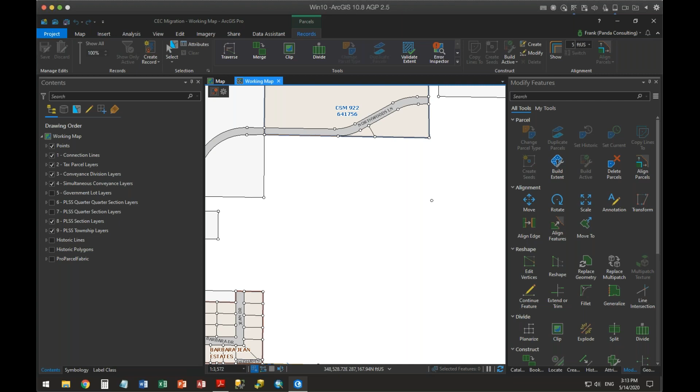So let's start with this. What is the parcel fabric? And those of us that are sort of computer people, we can look at this thing and say, oh, this little blue thing here, that's the parcel fabric.

Well, what is that? It was clear in ArcMap that the parcel fabric was a structure that constrained how things fit together. All right? It's gone. Instead, inside of Pro, the parcel fabric, and Esri shudders when I say this, but the way I describe it is that the parcel fabric is a super topology.

It is not a data structure as much as it's a tool that we can use to check what we've built to make sure that it complies with the rules that we've established for the parcel fabric. So that when we utilize the parcel fabric, what we do is we say...

this thing that I have right now, this is a parcel. Make sure that I have a polygon, make sure that I have lines that are associated with that polygon, make sure I have points at every break that I have in there, and make sure that they topologically fit within themselves. Not that they fit the surrounding things, but that they topologically fit within themselves.

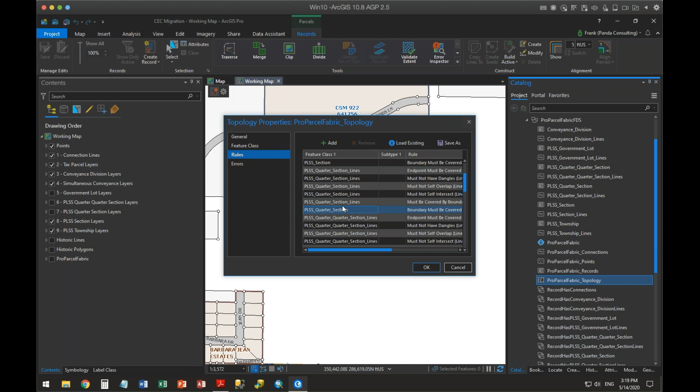That's all. So Frank, we have a couple of questions. Nancy asked, so it isn't a polygon of the area covered by the record? And then she asked, can one line have more than one record?

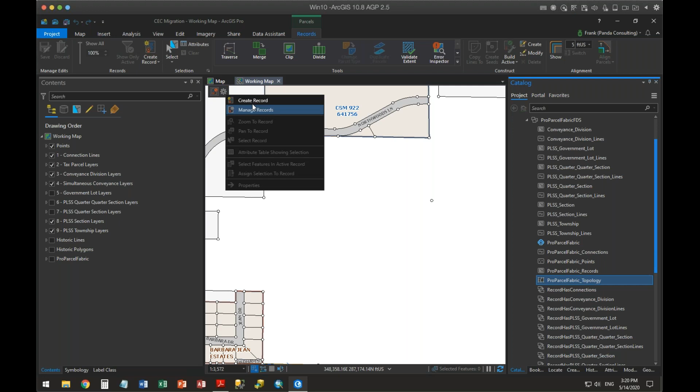Yes. Let me answer those questions. So a record is unique in that - I'm going to go in and create this just to illustrate. I'm going to go create a record over here. There isn't a whole lot of stuff in here, but that active record turns on the parcel fabric tools.

I'm on the parcels tab, and here are the specific tools. Now, watch - when I minimize this record hub, which is what this is called, those tools disable themselves. It won't let you do anything because the parcel fabric is turned off. When I re-enable it, those tools become active again. So it's nothing more than a series of tools to help you finish building your parcels.

So let's start with this. Let me go over here and just create a polygon. Now, when I create that polygon, it's just a polygon - it doesn't have points on it, doesn't have lines on it, doesn't have anything on it. Well, because the parcel fabric has these rules, when I say let's make sure that's a parcel, it built my lines, it built my points at the ends of them. Now it has all of that on there.

So what that's done is when I clicked build, it tested that polygon I had created, which had been tagged with the global ID from here. It says, okay, let's check this polygon that's sitting out there - does it have lines? Does it have points? If not, let's build them. That's all it does. But it also went and created, over in the record, a polygon that has the same geometry as that.

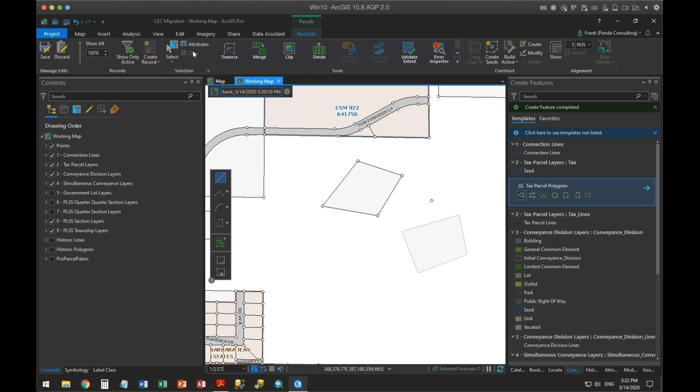Now, if I keep this same record active, I can go over and say, well, let's just create another polygon. I can unselect this - it doesn't have to be selected, because the software knows that the new polygon I created has already been tagged. I'll show you here - if I go to the attributes area, this polygon has already been tagged, it says it's been created by the global ID of the record. That's what that is.

So it says, okay, now I know what it is. And I can say, well, make sure this is a real parcel, so I can say build it. Sure enough, it went and built the lines, built the points for me. And now that record has a polygon, which is both of those. Let's go in here - in blue, this is the polygon for that record.

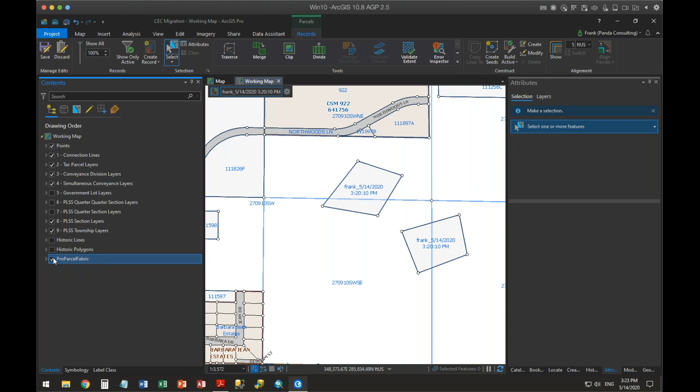So to answer some of Nancy's questions - I forget some of them. So, is it a polygon of the area covered by the record? No, actually it's the reverse. The record is sort of reactive - it shows you what's been built by that record. As a matter of fact, if I go into my hub and say, show me everything that's part of that record, it will go and select all the lines, all the tax parcels that are part of that record.

Okay, so it's sort of the reverse relationship. The record doesn't come first - the record is reflective back, showing what was built as a result of this. So the other question you had was whether a single line can be part of multiple records. The answer to that is no - it cannot be part of multiple records, because a line only gets marked by the record that created it, not any others that use it, only the one that created it. So it's not a one-to-one relationship, or even a many-to-one relationship. It's neither of those. A record keeps track of and marks itself - it's a good way to say it. It's like a dog.

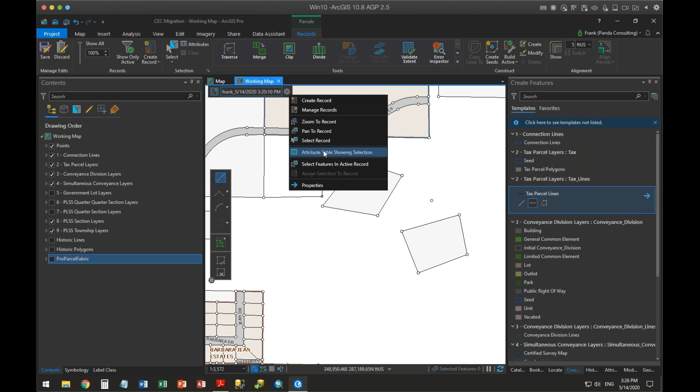If I say, okay, now create a parcel out of that, the test for determining whether or not it's going to create a parcel is this seed. Tell it to create a seed. In this case, I don't have a closed polygon, because select the records in here, I don't have a line across here.

It doesn't evaluate anything other than what is marked with that record. So if I go in here and say, let's put a line from here to here, again, and I can unselect it just to show you it has nothing to do with that. I can say, okay, now create a seed. Now there's a little seed here, you can see it.

It says, okay, now the things that are marked with this record, that will create a polygon. So when I say build it, it's going to evaluate the things that are part of this record, and it's going to say, okay, you've got lines here. These lines form a polygon because you have a seed there. I'm going to take that seed and expand it to those lines. And now I have a parcel there.

So again, the fabric does nothing more than help you to build the parcels. It doesn't evaluate whether it's coincident with the other things underlying it or on top of it. It doesn't necessarily automatically clip things and make sure that things are in the right place. It just makes sure that you have valid parcels. You have a polygon, you have lines, and if those points don't share corners with other things, it creates points. That's all it does. As you get deeper in it, you realize there's attribute rules and validation rules and constraints, but that's it. It's to help you build parcels.

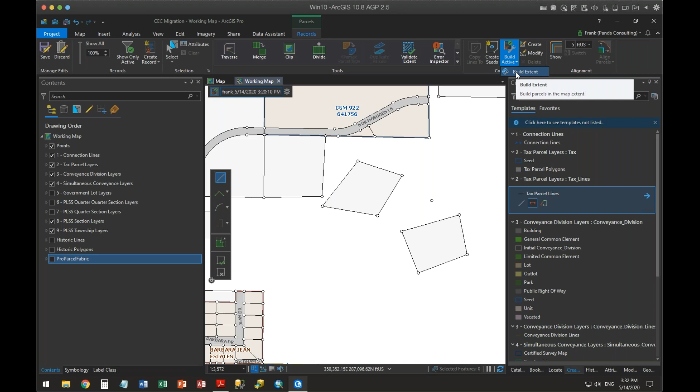And I can tell you, between you and me, go ahead. No, go ahead, finish. I was going to say, I've already found where I'm working on things and pulling data in, and sometimes I forget to do certain steps. I'll run through, and on this build active here, there's also this build extent, and I'll test to see, is everything in here built? It will test not just the current or active record, but all the other records inside the parcel fabric, and clean them all up at the same time. So it's a nice double check to make sure it's all built correctly.

What are the attributes of that record, Frank? I mean, you created the record, but were there additional attributes you could add besides your name? Oh, yes, yes. So let me go over here to the data designer now on the records. By default, there's certain attributes in here: an object ID, a shape, and a name field. And then there's a record type.

And the record type causes a lot of confusion, because from an organizational standpoint, if you want to keep track of a record and differentiate between different records, how do you differentiate? Do you say this type of record is for this layer, attributed by your parcel types? Or do you say this type of record is an action, a split, a combine, a subdivision, or whatever? Do you define it by action, or by the document itself? With the ArcMap Parcel Fabric plan, it was always, let's reference it as a document. But the reality is, with a record, you can do anything in there, and there is no best practice defined by Esri yet on it.

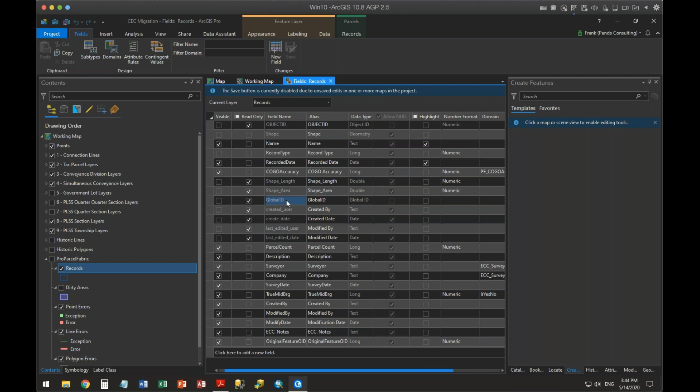All right, and then we have shape, length, and area, and the global ID, and then all the edit bys on here. The records also have a field called parcel count, because as I showed you and demonstrated, you can have a record that has more than one parcel in it. So you can have multi-part records on here because it reflects all the parcels that were created while that record was active.

That's why, in 2.5, it actually has this additional field called parcel count, which tells you, oh, this record actually has 4 parcels associated with it. And really all it's doing is telling you how many parts are inside there.

And this data set that we're looking at right now was originally an ArcMap Parcel Fabric that we have migrated over. So it has the ArcMap plan attributes in there - description, surveyor, company, survey date, true mid-bearing, created by, modified, all those others. So if you migrate an ArcMap fabric over, it keeps those plan attributes and puts them into the record.

And you can add your own. I mean, this is nothing more than a feature class. It's just now included within - and I know Ashley doesn't like it - super topology, that's all. It's just another way to go and validate and test those other things on there. That's all it is.

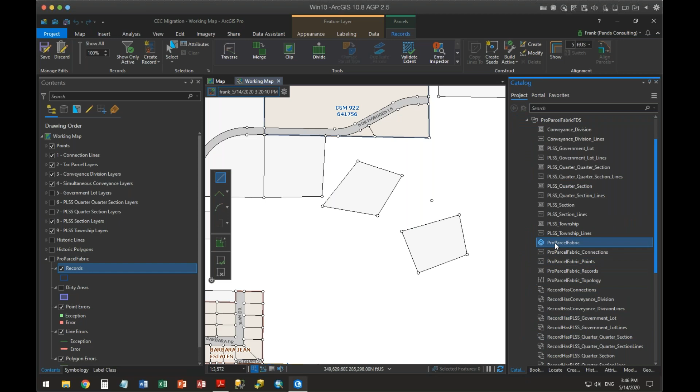All right, so if I go in here and add a new... let's see if I can do it here. Yeah, if I add a new parcel type here, it has the option that says use for administrative boundaries.

So if you think about it - oh, now you understand. So what it does is it lets it go and utilize the definitions, but doesn't necessarily utilize the topology engine for it. So it makes sure that you've got all the lines, makes sure you got all the points, but when you go and edit something around there, it doesn't mark it as dirty.

So you can have zoning layers, market areas, city boundaries, ESUs, county boundaries that become part of the fabric, part of the super topology, without it messing up your topology. Because if they participated in topology, every time you edited something inside it, the entire county would be marked as dirty and you'd have to reevaluate everything. So at 2.5, they have the capability to say, I want this to participate in a fabric, but don't make it part of topology.

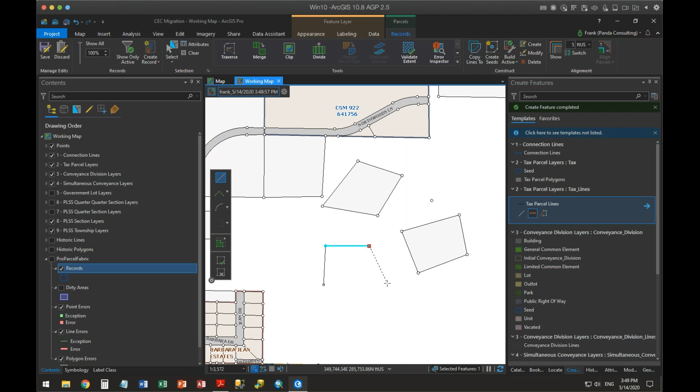Simple enough, I will create lines. Now this new one, if I wanted just to verify how this works, show me the lines that were created that are marked part of this record. That's all it's doing. So there's the lines that were marked as being part of this record. Let's check and see if it closes - that's what create seeds does. Sure enough, it's closed. Now let's go and build this.

Let's go and build it. So let's look at these records. Here's my lines. And in fact, I will bet you that I have turned this off. I am so sorry.

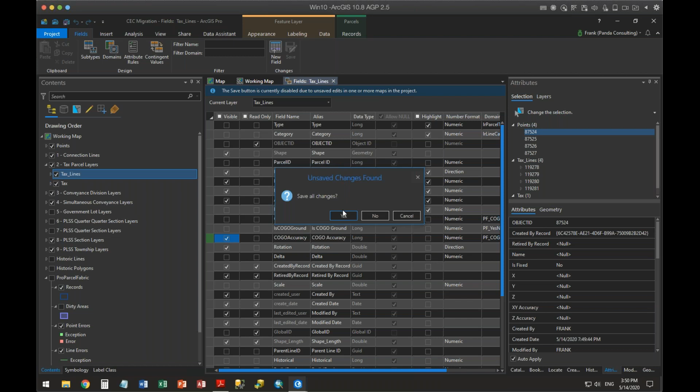Let me go in here and turn on the COGO Accuracy, which still should have been in here. Oh, I have things that are not saved, sorry. Now that I've saved them, let's go ahead and save that out.

Well, the good news is you didn't hang the entire program doing that, which I have done. Correct.

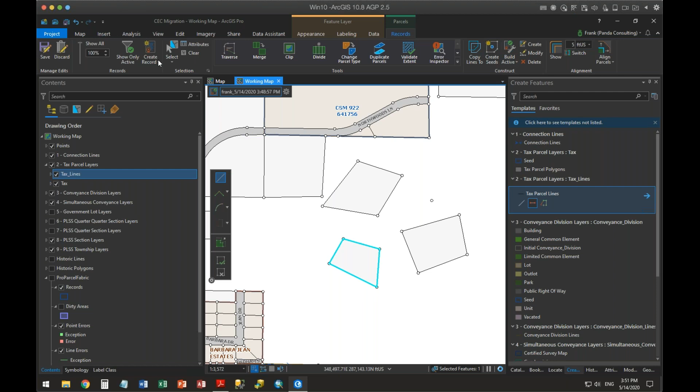Okay, so COGO Accuracy - well, let's just make sure that maybe it should have been turned on for me to do that. So let's test this. Same record. I can go and create the parcel lines again. My record is - let's create the seed, let's create the parcels, let's go and select this. By the way, I kind of know the answer, but I want to work through it just for you.

Nothing. Thank you. Nothing. Well, the reason why I know the answer is because out of the box, most of this stuff doesn't get calculated. Out of the box - this is more of a design strategy than anything else. Out of the box, the configuration, the attribute rules, what gets inherited - none of that is set. You just want to be aware of that. Yes, this is a fabric and it will do some minimal things for you, but don't think it's all set up for you. It's not.

Let's just go to the polygons just to make sure. Now, I think I've turned that off on there too. I have, because I don't use it much. Yeah, it doesn't, by itself, necessarily allow you to go and automatically have that set. You can set it up for yourself, but it doesn't necessarily say that out of the box, it's going to inherit any of those values between them.

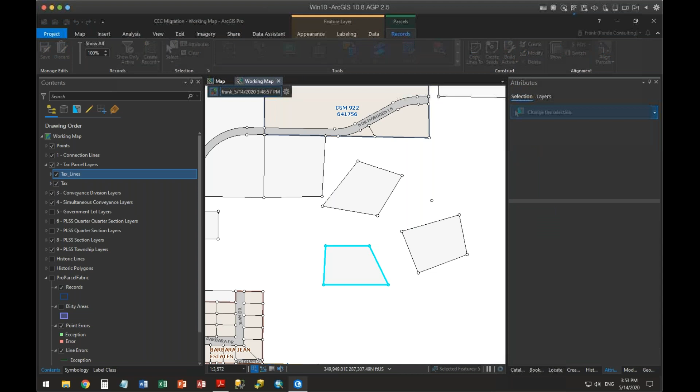Thank you, Brian. All right, so let's go and select everything in here. Let's delete that.

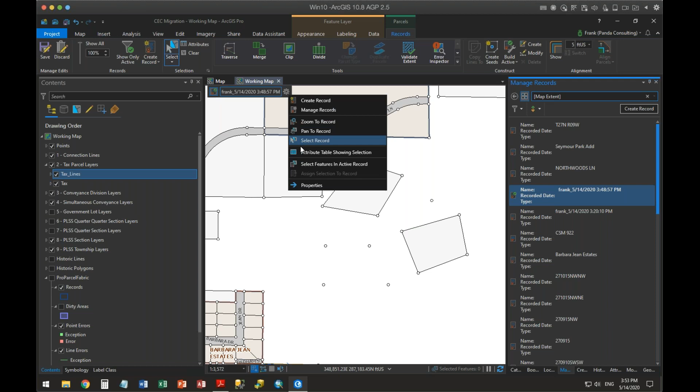Let's go and also look and see in our current extent. Here's the other one that I created. And let's go and get all of those. Maybe it's not this. No, maybe not. There's another one.

So we went down a big rabbit hole there, didn't we? It's good though. I think it was worthwhile.

So do we have any questions right now of anything?

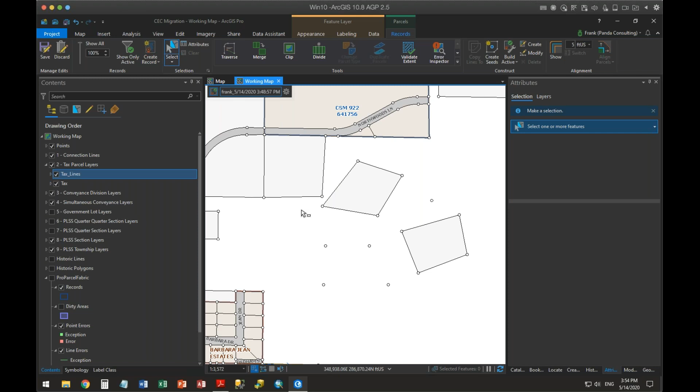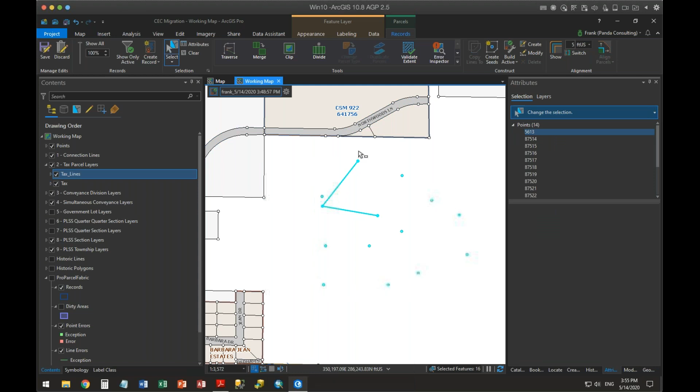Let's go here. A little bit clean up there. All right. So...

I think the next thing I wanted to talk about was some of the nice things Esri has done with the Traverse, and what the Traverse is and what it isn't. I find that as I'm teaching it, Esri now has three different versions of Traverse we can use. We have the ArcMap version, which everybody learned and loved. We have the ArcMap Parcel Fabric version, which was a little more challenging to get into, but once you got into it, you learned to love that also. And then you've got the ArcGIS Pro Traverse version. So let's talk about this and what this is.

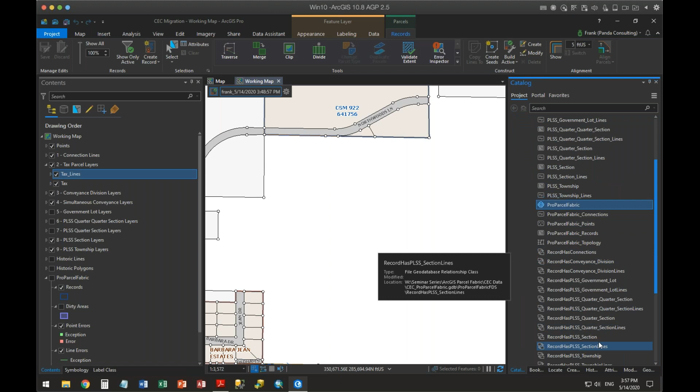So the Traverse allows you to go and create lines that have COGO values on them. And that really is it. It just allows you to create lines that have COGO values on them. The COGO values, and we've talked about this before, if we go and look at a COGO line, a line that's enabled with COGO values, tax lines.

I could have done this differently, but here it is. We can see that, for example, the direction field, which many of us just refer to as bearing, is no longer a string value. It's now a number value. It is stored as a numeric value. And from what I've seen, it's actually stored as a numeric value that is basically north azimuth, starting at north and going in a clockwise direction. You can tell it how you want that number shown back to you, whether you want quadrant bearings, south azimuth, polar, whatever. But I think it's actually stored as polar, and it's decimal degrees in there.

So sorry to interrupt, we have a question though. Why is the Traverse Tool located in the modify features section rather than the create features section?

Nancy, it's a good question. You've heard this before—the how-do-I questions, where-is questions, those are easy to answer. The why questions have to do with somehow having insight into the design, and I don't. Why is it like that? No, I can't answer that. I can tell you where it is, how to use it. Why? I don't have any clue on that. It's a thought process we're not privy to. That's exactly right. Thank you.

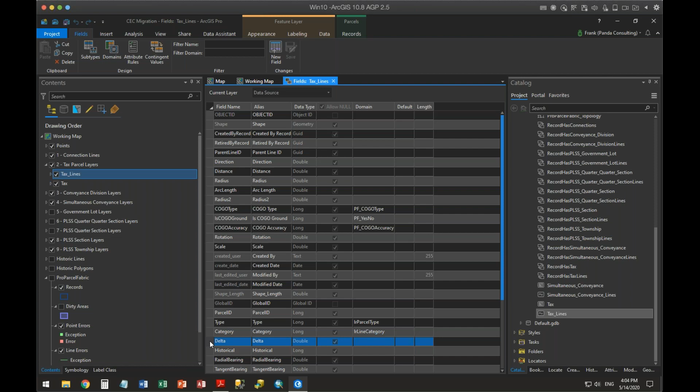That's a great why question, because from a surveying standpoint, the central angle of a curve is more important than the chord distance or the arc radius, since that's the real definition of what's being subtended there. Now, as Reed says, you can calculate that, but the chord distance is the approximation between the ends of the curve—it's the distance between the ends of the curve. The arc distance shows you how much of a bend is in that curve, but the central angle, because we don't have radius points anymore in the ArcGIS Parcel Fabric, isn't needed anymore. Some might point out, well, you've got one here—that's a carryover from the ArcMap Parcel Fabric. But inside the ArcGIS Parcel Fabric, you don't have that COGO value anymore.

With that said, if you have COGO lines, you can now go and do COGO on them. Once you enable the COGO lines, you can go and do COGO on them.

So the first thing when you go to enact COGO is, well, what feature class are you going to be creating lines for? And I can tell you, watching the way this thing gets run, it always shows you the line that's up at the top of your table of contents. It kind of drills from the top down, and because you can have multiple types of lines, you can have a connection line, you can have what's called a link.

You just want to be careful when you're starting a traverse. Virtually every single person I've taught has created a traverse and said, Frank, there's something wrong—it wouldn't create seeds. Why did it not create seeds? Because, and I can almost always answer this, it's because you created connection lines, and you use connection lines to build a parcel, and there's no parcels associated with connection lines.

So, starting at a start point, it comes down to giving the bearing and distance, or the direction and distance, and you can use shortcut notation—a bearing, a dash, and a quadrant. Then a distance field—let's just put 200 feet in here and hit return. Every time you do that, it will move, and you hit return, it'll move to the next one. The difference between the ArcMap traverse and the ArcGIS traverse is that you hit return, not tab. It's return on each of these.

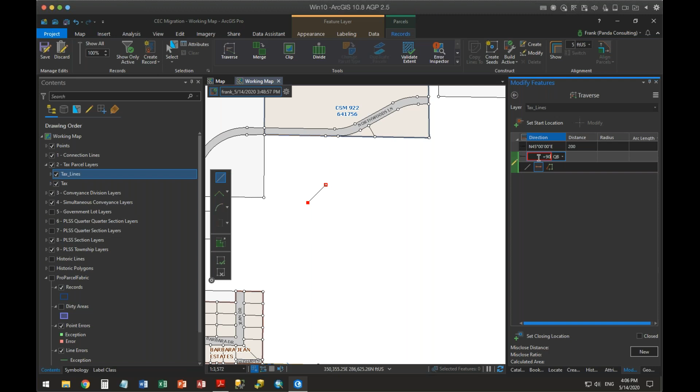So once I've done that, I can go in here and input my next one, whether I'm transcribing a deed or just building something here. I can also do a deflection and say I want to turn 90 degrees to the right from the previous direction. So I can type in my deflection, then type in my distance, and it will do it. The other key difference is that the ArcMap fabric created a sketch, and it wasn't until you hit enter at the end of it that it took that sketch and created lines from it.

This traverse, every single time you hit enter, it creates a new line. It constantly creates lines. So these two lines already exist in my data set, even though I'm still in the middle of a traverse.

And that's a big difference you want to understand. It's not creating a sketch. You can take your courses that you've done and export them, store them as a series of lines, but it doesn't function exactly the same as the ArcMap traverse does. Every time you hit enter here, it creates a line.

So my initial thing was, this is the way to create lines that have COGO attributes on them. So if I wanted to create a curve at the end of this, I could say this is my tangent bearing at the end of it, type 0 here, and say my radius is maybe 50 feet to the right. It's not going to be an arc length I'm putting in, but the delta angle or central angle, 90 degrees. I can do that, and it will give me the tangent bearing coming out of that curve.

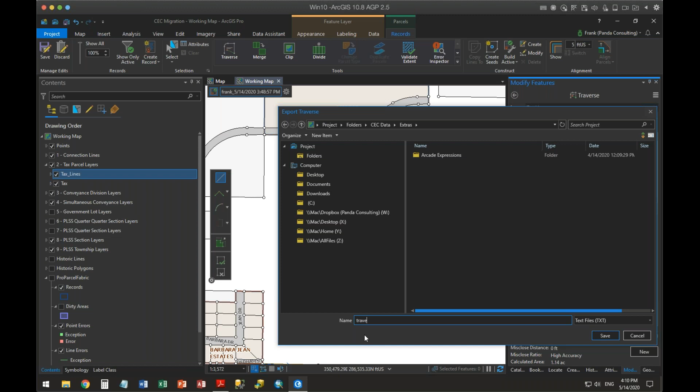So let me show you these things. I have now a set of courses that I've created lines from. I can go in here and export this out, put it into Extras, put it in as a traverse file, and this is a text file. I can save it out there.

When I go to look at it... traverse text file, I can then edit that. Sure enough, this is exactly the same format as the ArcMap traverse file. The direction type is quadrant bearing, the direction units are degrees, minutes, and seconds, the starting coordinate pair, and then direction and distance, tangent curve. Delta is 90, radius is 50, direction and distance.

So it allows me to at least record what's on here, what I've done with this, and allows me to go and input all this. But every single time I do something, it goes and actually creates that feature.

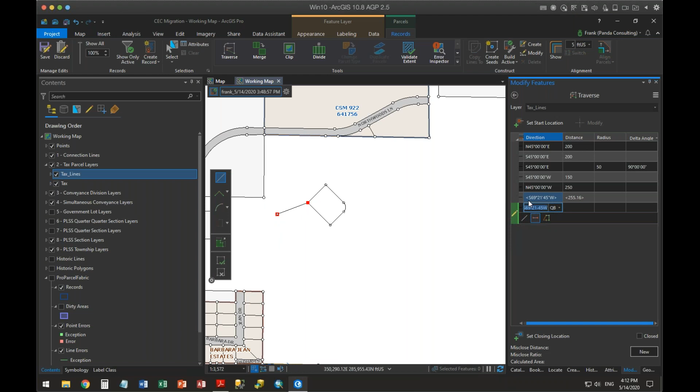So for example, if I wanted to create a line that went here, I'm just going to digitize this here. Notice what happened here. Esri has said, well, the things that you digitize don't have the same weight as the things that you input.

So if I digitize a line or distance while in the traverse, it doesn't store anything for me. It will record what that was, but it will just put brackets around it. The brackets mean that as soon as you're done with this, that line is not going to have any attribution on it at all. That's what those lines were. If I wish to remove them, I actually have to click in there and edit those brackets out. But that will allow me to get an approximation or a measurement on it.

So I'm done with this. All right, so let's go and ask a couple more things. Brian was asking me, well, what happens if in fact you go and do this?

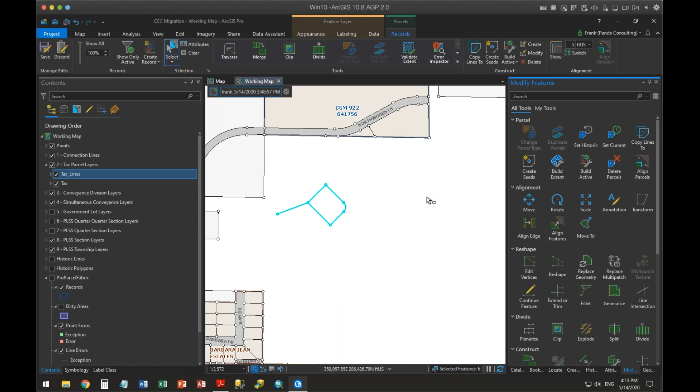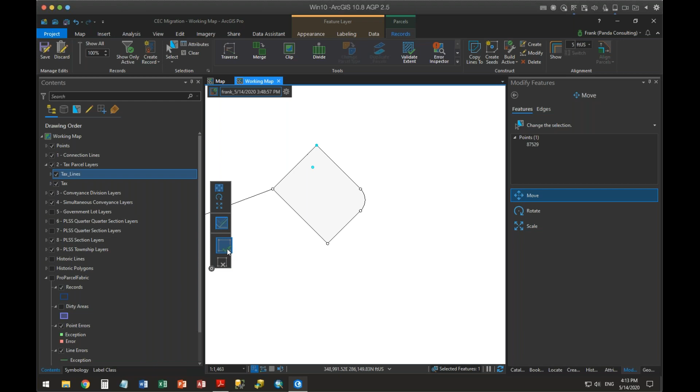I'm going to create a seed here. I'm actually going to create a real parcel out of this. All right, I've created a parcel on here. What I'm going to do is take this point and move it. When I move that point, it's gone and moved everything that was in there.

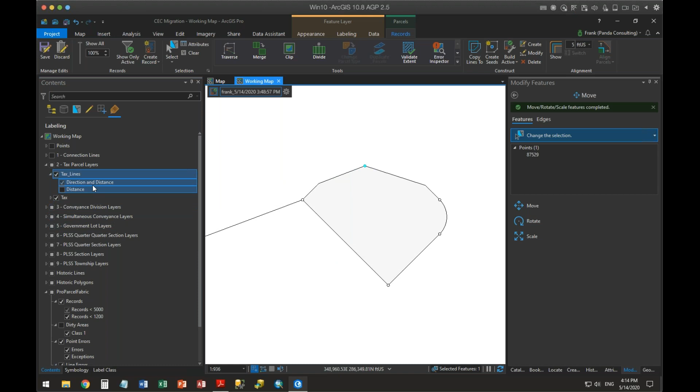When I actually turn on my lines to label these, I'm going to label the bearings and distances of these lines. All right, I've got a lot going on here. Let's go and see what's happening here.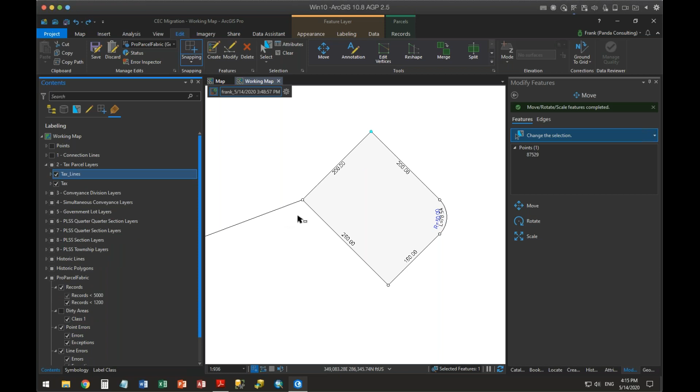Frank, Brian now asked - go ahead, continue, Nancy.

I was just going to say, similar to what Brian was asking, is that if you did that topologic change that changed the cartographic presence of that parcel, then if you run an adjustment and it had used those record attributes, it would have respected the record attributes, not the inverse that you created by moving the line.

So we're still in the speculative realm here, all right? Because we haven't seen exactly how least squares adjustments work. Yeah, so least squares adjustment.

Fair enough. There's two types of adjustments that can be done. There is a least squares adjustment, which depends upon the recorded information on those lines and uses that recorded information to figure out how things work, right?

So theoretically, if I had done that topologic movement and I did a least squares adjustment on it, the question is, how valid are those measurements still? You know, from a surveying standpoint, those are observations. How valid are those observations within my overall weighting of my least squares adjustment?

I would say not very valid. So maybe it's not a valid thing to do.

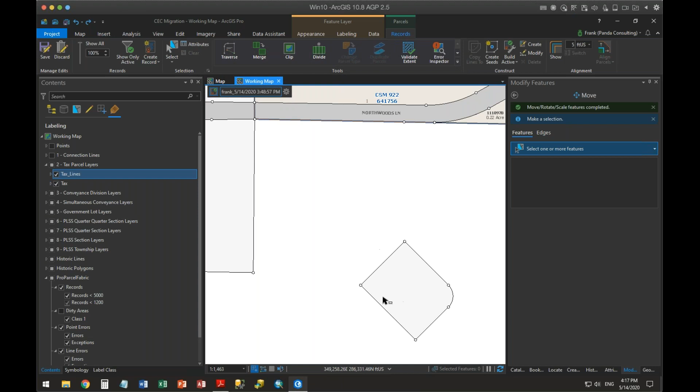I'm going to adjust this and tell it where to place this. So I'm going to go to records now. And by the way, I've got an active record and it knows where this thing is, it knows what's attached to it. And I can go in here and say I'm going to align the parcels.

All right, and I want to go and say that I want to take this piece and go over here, and I want this piece to go here, and align these on here. I've told it I want to align my active record - that's what I clicked here. The things that are in my active record, go ahead and align them and put them here and do that.

All right, it went and aligned that, but it didn't align everything else. This was way far off, but it would allow me to go and place this.

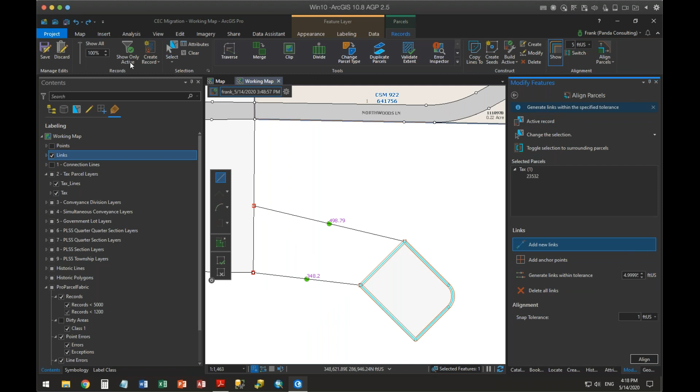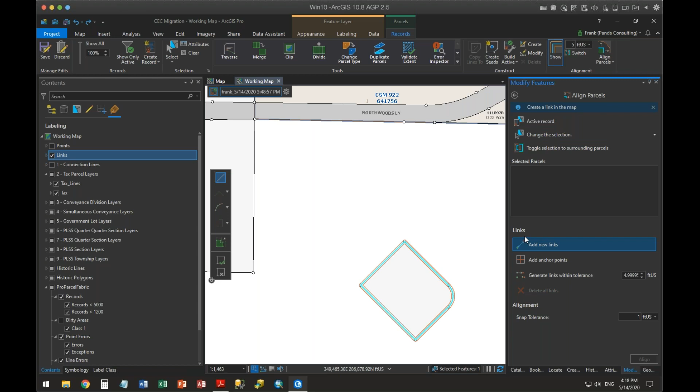Let's undo that again, and let's go back and do this a little bit more realistically. And delete this, delete this one. All right, and instead let's do the active record. Go from here to here, here to here, and here to here.

Again, I probably should have put a geometry on this here, but so the question of contiguity, the question of along, adjacent to, contiguous to, all of that - that's all handled by these geometric adjustments that occur within the parcel fabric.

Again, I just took that thing way off and did that, but it sort of will show you that's sort of how these things within the parcel fabric, how this thing would work, and how it's supposed to work on here.

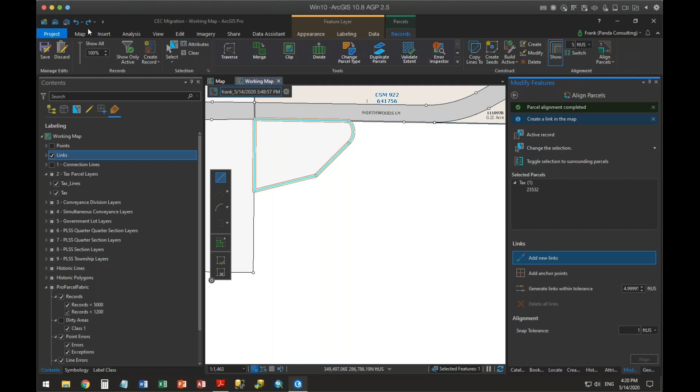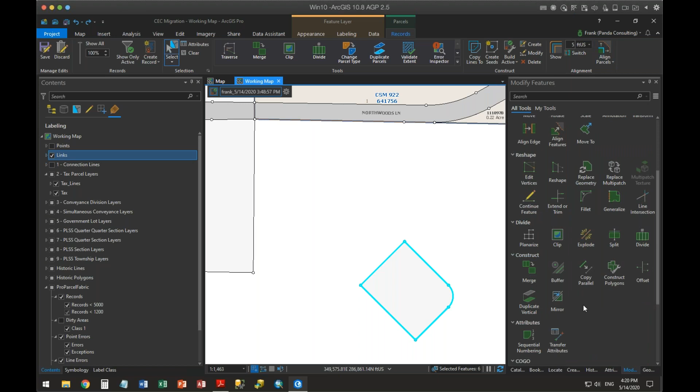I can tell you that this is a parcel fabric tool, but let's go and do this. Let's get off of here. Let's take these two and get rid of these and get rid of this. Let's select everything that's in here, but instead of doing this one, let's go and do a standard transform.

All right, now this is a standard tool that says okay, here to here, here to here, here to here, and here to here. Now I can tell it the different types of transformations that occur.

Again, this is not a parcel fabric tool. Parcel fabric assumes you're going to place this thing very close to where you should be. In this case, this is just a standard editing tool. Let's figure out, do I want to do an affine transformation? Do I want to do a similarity? Do I want to rubber sheet this using linear adjustments or natural neighbor? I can test them all on here.

So let's do an affine transformation. An affine transformation requires 3 links on here. That's not bad to do an affine transformation on here, right?

Not bad. I go back here and say, well, maybe I don't want to do an affine. Maybe I want to do a similarity transformation and have it go and do that. Yeah, that one's not quite right because of that corner there.

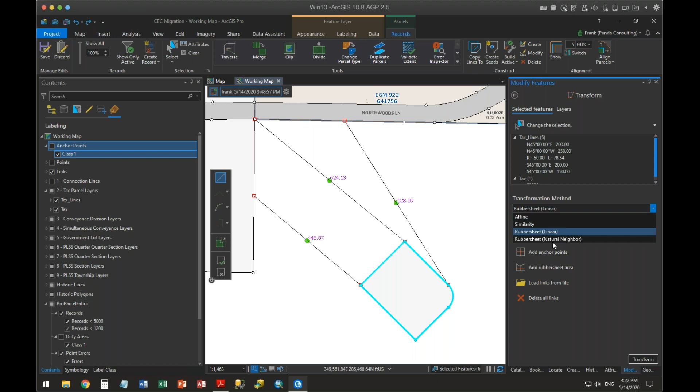Let's go back. Maybe I want to do a rubber sheeting on here, a linear rubber sheeting. Definitely not. Definitely not. And maybe a natural? Definitely not.

So in this case, simple tools will sometimes allow me to get a different solution than the parcel fabric tools. Again, it comes back to this - I am so glad you started us off with that, Nancy, to recognize that it's nothing but a bunch of tools, some of which will make sure that everything in your parcel is what's needed, and other things are just, how do I use these tools to get this thing to go where I want it to go?

Okay, so by the way, if I still had issues here, I could then go and do one of Nancy's tools, this Align Features tool. And I could tell it to go and draw a line and just tell it - that's my fave, there it is.

I could say I could go from here to here and take every point that's along there. Oh, let me go and turn off my parcel fabric topology. And tell it to go ahead and align. I could do the same thing over here.

So it's a combination of learning these tools, but using that power of the parcel fabric to really reinforce and make sure everything is right on there.

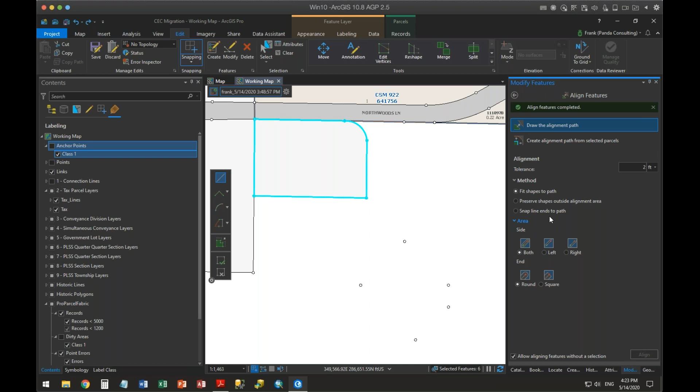All right, I do want to go and share with you one of the things - if you were really watching me, you saw the traditional way of creating a parcel was to go and draw lines and then figure out if it closes and build a polygon, which is how you would prefer that we do this. So that's the most common type of workflow.

Matter of fact, if I look here, I don't have corners here anymore. Let me go back here and let's build - and now I have the corners on here. There's a slight difference in the symbology, but now I have corners.

So the common element, the common workflow is create a record, build the lines, create the seed, build the polygon, put it in place. It's commonly the workflow you've got.

But because we recognize that these tools are really nothing more than another way to make sure we complete our parcel, I can go in here and say I want to build a polygon. I want to start here, I want to go to here, I want to go perpendicular to this, to here, and I want to go to here. All right, and I want to finish that. There's a polygon that I've built.

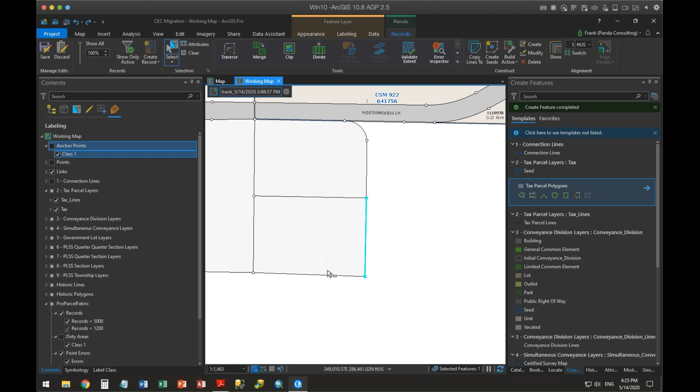And sure enough, now I have everything I need. If I look here, there's my one line there. There's my other line there. It's built it all for me. So the parcel fabric will let me build this. I can build things, whatever is easiest for me.

I can build it from lines if I've got a metes and bounds description. If I've got an existing parcel that's used and I've got an aliquot description, if I've got a description that says, hey, go and take the north 10 feet of this parcel, well, you know what?

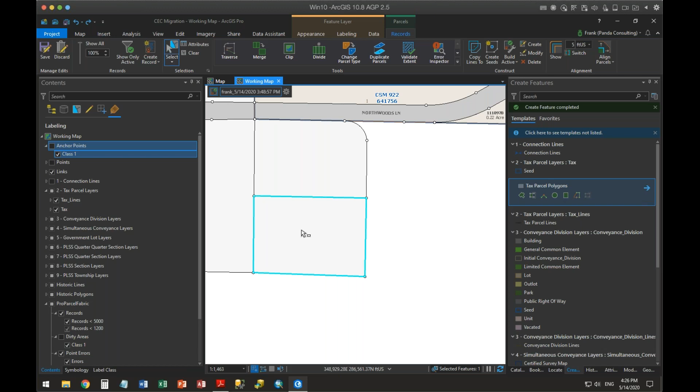I can go in here and use my divide tool and say that I want to divide this. I want to take 10 feet off of this end. Let's make it more so that you can see it. I can take 50 feet off that north end. That's an aliquot description.

With the parcel fabric, I could say go ahead and divide that thing up. And I've now done a split on a parcel. Let's make sure I've got everything I need. It's all built, I've got everything I need for this parcel. I just did the north 50 feet of that parcel for a transaction.

You don't necessarily have to draw lines. So you could have a record that would be the May 14th, 2020 work, essentially, right? Because it looks like you're accumulating it all into the same document, or record, right? I mean, that would be a strategy.

Yeah, it's not a great strategy. It's a great strategy if you're working in one area, because remember, it's not just these lines and polygons I'm building, but every time I hit active or every time I tell it to build it, it's also building that record polygon. So if I go and build things all across the county during the day, it's building a record polygon that is all across the county.

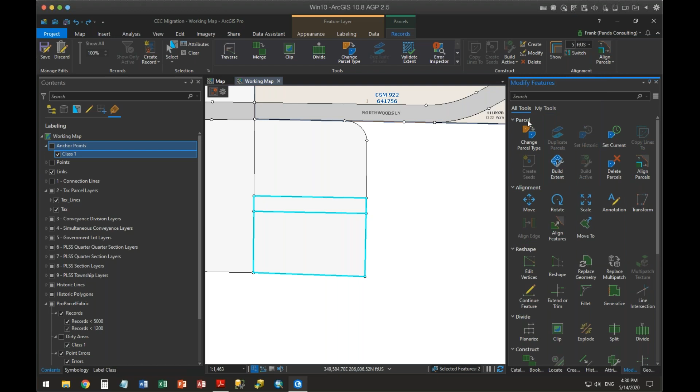But I can still use the tools? You can still use all the tools. The only tools you can't use are build and align. Build is just going to check everything else, make sure you've got everything in there. Align is just going to look at your active, but with align you can even select and say I just want to align this. So maybe I misspoke there, you can use all these other tools. You just can't use copy lines to, or create seeds, or any of these other record-related types of tools. But you could use everything else in there to do all your cleanup.

Matter of fact, Esri talks about this as record driven and quality driven. Quality driven workflows are where you're just cleaning stuff up. You're in there, you got something bad, you want to fix it up. You don't have to go and create a record for that. The tools work across this. But you could create a dummy record for the purposes of cleanup if you had to. I've done that, yeah.

We go and do it. That's sometimes a great strategy too. Not optimum, but okay.